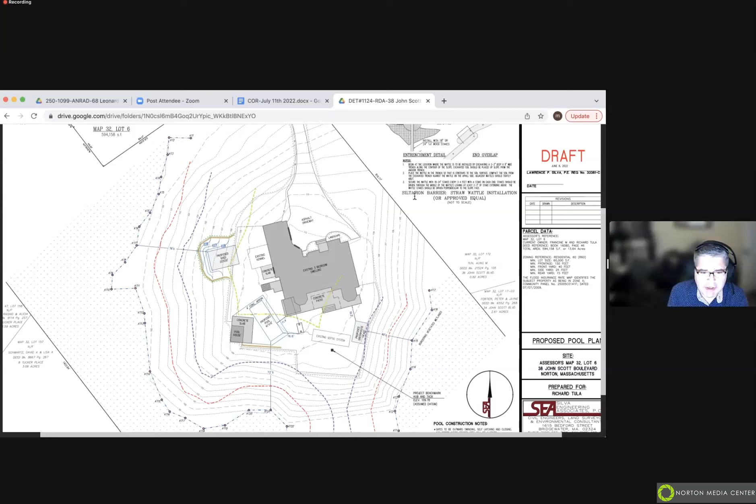Yes, and for some reason I'm having a hard time finding my plan, I have so many different drawings and so many different plans. But let me see if I could. It's just something to consider to cut down on the grading back there. Sure. Okay. So if you just rotate it, you don't have that grading. Oh, I see. Oh, you have it up. Okay, great.

Okay, so rotate it so the long side is perpendicular to the house. Yes, the front and the back running parallel with the contours. It will just cut down on your grading. Yeah, that's not a problem. I can do that. That's easy to do. I mean, if your footprint's going to be the same, you might as well. Yeah, the only thing I was trying to do is sneak it in between 2 trees, just go straight back between 2 trees.

What I can do is put it more towards the house and avoid that one tree that's probably about a 20 inch diameter tree that I was trying to avoid taking down. Okay. But I can rotate it. That's not a problem. I can do that. Okay. I mean, whatever works best for you. Either way, it's in the outer buffer zone.

Just a word of caution. If it's that tight between 2 20-inch trees, it may be prudent to take one of them down, because as the shed sits there, both trees will grow and potentially get very uncomfortably close to your shed, in any kind of weather. You'll have to decide. You may need a little bit of a clearing to make that shed functional without a lot of unwanted maintenance.

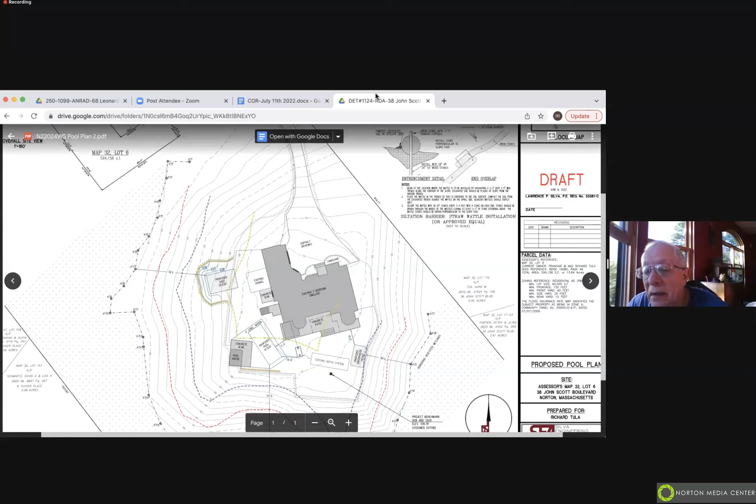So if there are no further questions, we can consider a motion to close the request for determination, 1124. Say again, was that a question? If there are no comments from the audience or questions, I'll make a motion to issue a negative 3 for DET file number 1124, 38 John Scott Boulevard. Well, actually, what we need to do is wrap closure of the hearing into that motion, and we may need to close it and then repeat the motion. Yeah, right.

I'll make a motion to close the public hearing for file number DET 1124. Second. Motion made by Lisa and seconded by Dan. Again, roll call vote, starting with Mark and Dan. Aye. Aye. And Carrie and Lisa. Aye. And Tama and Ron. Aye. Aye. And I'll throw in an aye. So the motion carries. We're now back in a regular meeting. We can consider a quick motion on a negative determination for file number 1124.

I just had one question. What does a negative determination mean? Yeah, it means that your project will be approved as submitted, and the negative part means you do not need to file a notice of intent, because the title of this process is a request for determination of applicability, which means you can either have the project approved as it's submitted, or you need to go through the more extensive notice of intent process. Okay. But because this is somewhat of a limited project, it's perfectly acceptable to be decided as a determination, and a negative determination means you're all set, and it just has to do with the paperwork on the form. Understood. And it's so-called negative 3.

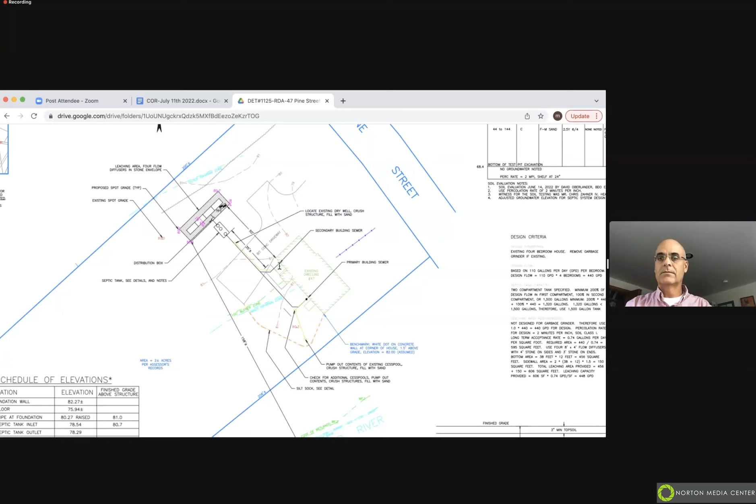Yeah, so other than that, it's pretty straightforward. The elevation up from the river is, I forget exactly, but I want to say we're like over 12 feet higher than the river. So, any questions? Yeah, I just want to add some details.

So this is on Pine Street where I believe the Rumford River crosses under Pine Street, just before Plain Street takes off. So it's got that complication. You can just see the Rumford River there at the bottom of the plan. And the first 100 feet is illustrated there as the inner riparian zone with the solid blue line with the dots. And I'm not sure the outer riparian zone is visible on the plan. It's actually just north. But that's the only complication.

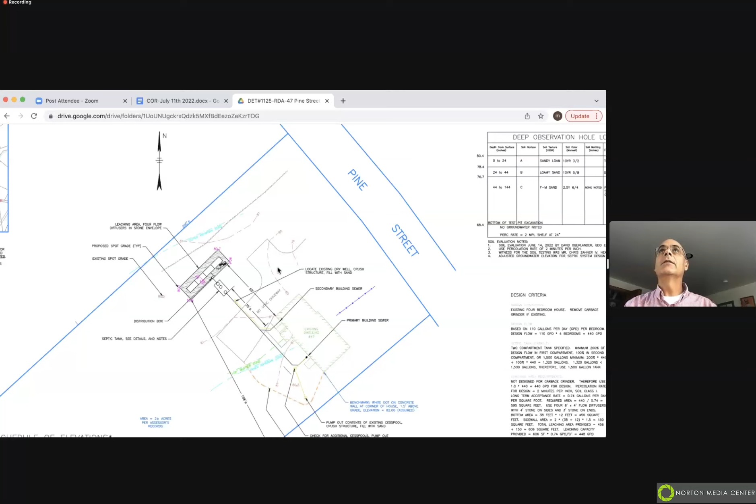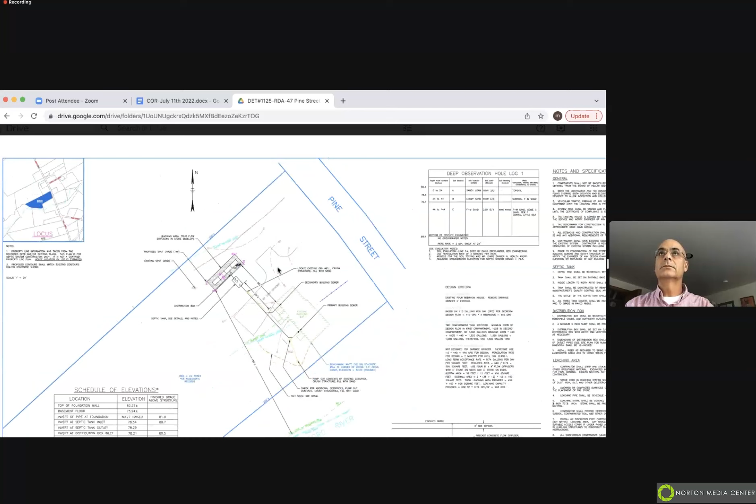But as you said, this is a very standard repair. The only issue is, let's see if you have illustrated sedimentation control. Yeah, I do. There's a detail on the plan, and then we're showing the silt sock from the left rear corner of the building foundation up to the high point at the driveway. Yeah, actually, I mentioned the wrong thing, I mentioned the water line, but on the plan, it's visible as the long blue dotted lines. Do any commission members have questions about this?

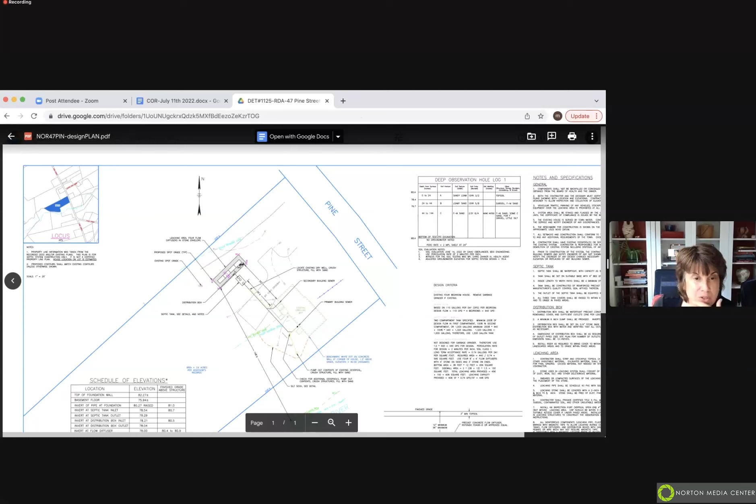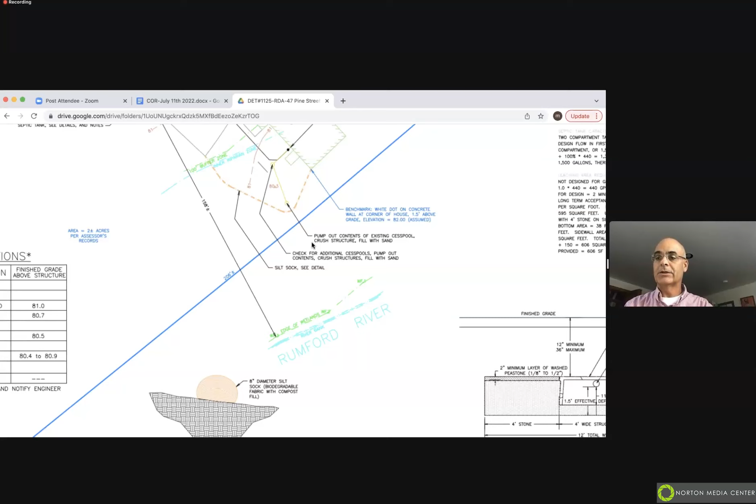And Dave, did John Thomas review the flags associated with riverfront out there? I just see EDW limit. Megan, can you zoom in on the river, please? I assume John Thomas went and looked at those flags. Yeah, I'm sorry, you kind of came over garbled a little bit, Lisa. Could you repeat that? Who did the flagging, and did John review it? I did the flagging, and I believe John reviewed it. Yes, because he reviewed the plan initially, and I got back some comments a couple of weeks back. Okay. Well, as long as he reviewed it.

And then, for some reason, my copy of this RDA is unsigned by the applicant. Megan, is there another one on file with the applicant's signature? Typically, I'd sign them as a representative, and I've checked with DEP before, and actually, I went through this with Jennifer, and I'd say the last 20 or so I've done, it's either the rep or the owner. Yeah, when I stop sharing the map, I can double check. Okay. Those are the only comments I had. Thank you.

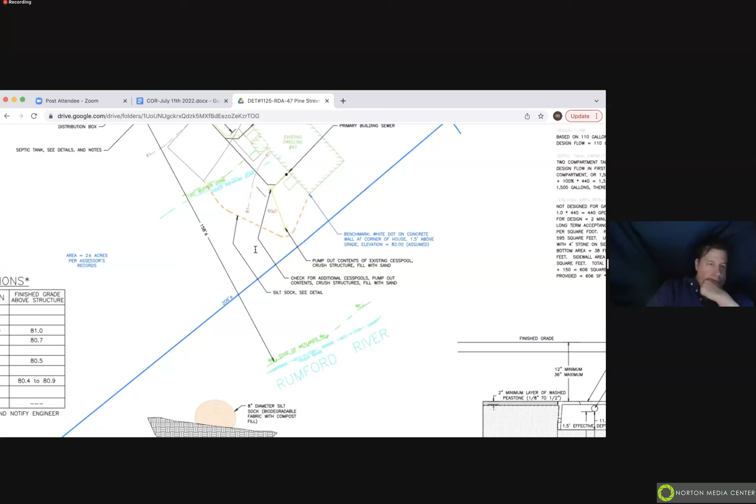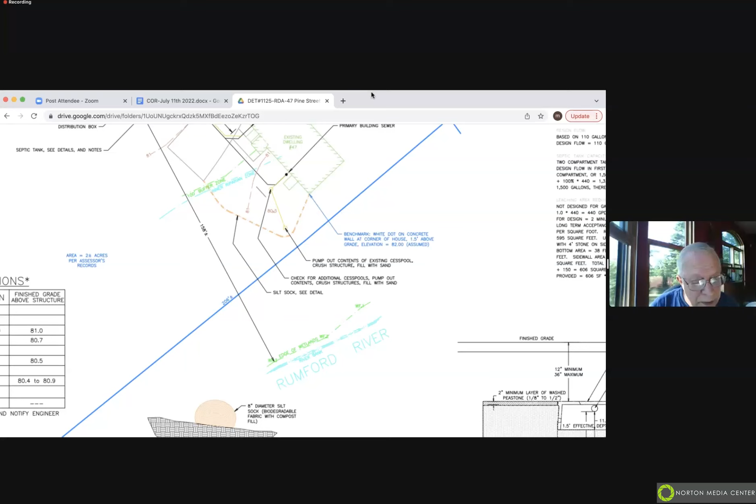John did leave a note on June 28th, 2022. He inspected the site and validated the resource areas per the submitted plan. He also had no concerns and recommended a potential negative determination after deliberation. Any further questions from members of the commission? And I think we can open it up to any audience members if they have any questions or comments. You can take your mic off mute and ask them. Otherwise, this is a straightforward project, and we can consider a motion to close. This is a request for determination of applicability.

I'll make a motion to close the public hearing for file DET 1125 for 47 Pine Street. Second. We have a motion made by Lisa, seconded by Ron. Again, we will do a roll call vote. So starting with Tama and Mark. Aye. Aye. And Carrie and Lisa. Aye. Aye. And Dan and Ron. Aye. It looks like, Dan, you have a check mark up there, so I'll throw in an aye. So the motion carries. We can consider a negative determination if somebody wants to make that motion.

I'll make a motion to issue a negative determination for request for determination for DET file 1125. Lisa makes a motion for negative determination. Do I have a second? Second. I think Tama got the second. So again, roll call vote starting with Tama. Mark? Aye. Dan? Aye. Carrie? Aye. Lisa? Aye. Ron? Aye. And I'll throw in an aye.

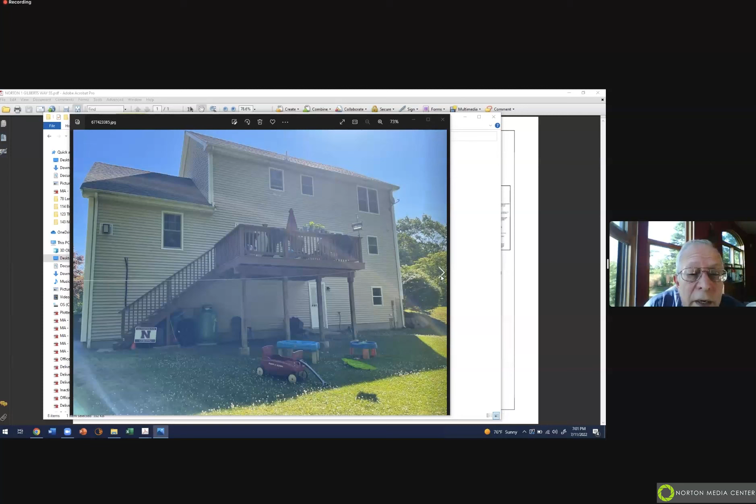So basically, you have a structure with a stair going up to the deck that is elevated on what looks like 4x4s, although they may be larger. And you're saying all of that would be removed, and the all-season room would be on the first floor, extending to the second floor, or? It would just be the first floor. You see the red umbrella there on the deck. There's a slider here, and the all-season room would basically just be same floor level. Same dimensions of this deck, so we're going to keep that same space.

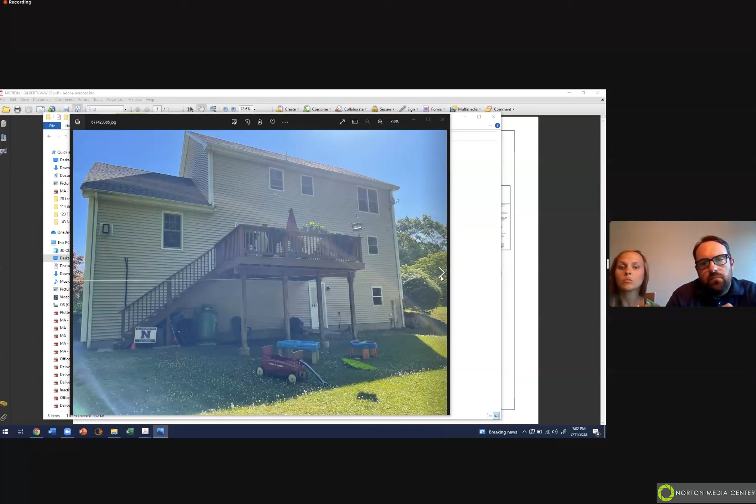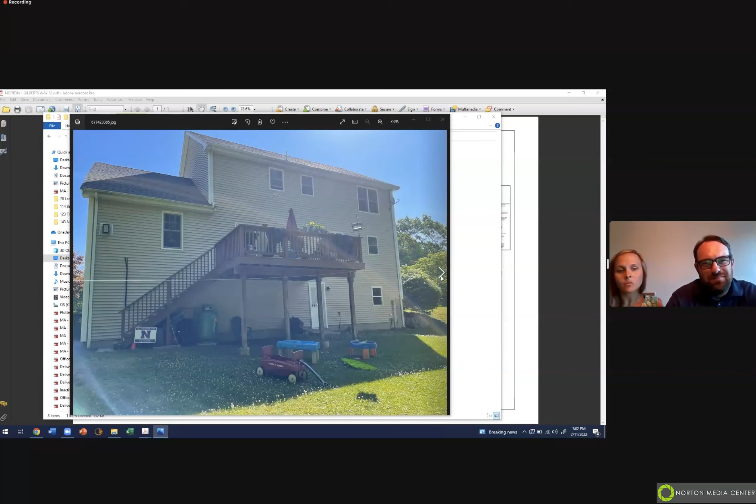And then going towards the back right of the house, that's where we'd have the new deck, for outdoor space. And then you would have your set of stairs coming back down towards the driveway. Right now, the way it sits, it doesn't actually impact where the pool is. There's actually a few feet from what we measured, but it does come close. We just don't want to take a chance. Great. So the all-season room is going to be on the first floor or the second? It will be on the first floor. Here, I'll show you. Okay. All right.

So this is the first floor plan here. It kind of shows the new covered front porch that we have here, some new stairway walking into the entryway. So existing first floor plan, it would be an open floor plan. It actually just walks in the same elevation as our existing floors, and it just copies the layout of the existing deck. A new slider will be installed here, so they walk out to the new deck space here, and then the steps going down.

All right. So these are actually issues that are not directly under conservation, but one of the comments that our conservation director made is that you really need to have the building inspector involved with regard to the additional footings, because this is not just a simple deck. This is kind of a structural portion of your house. So I assume you've involved the building department.

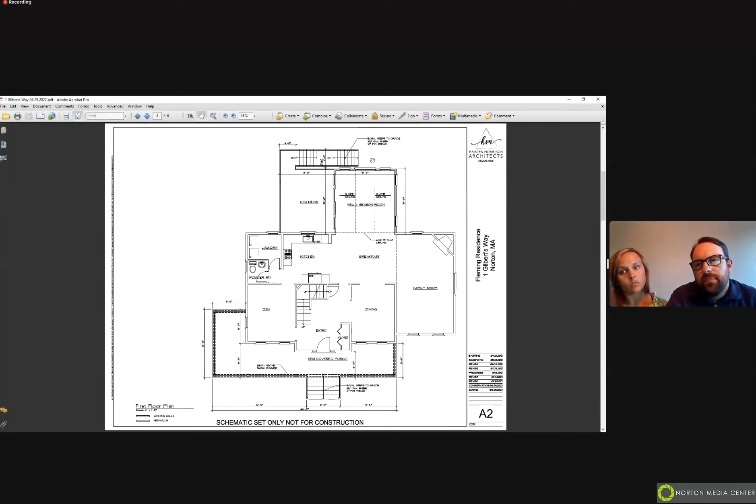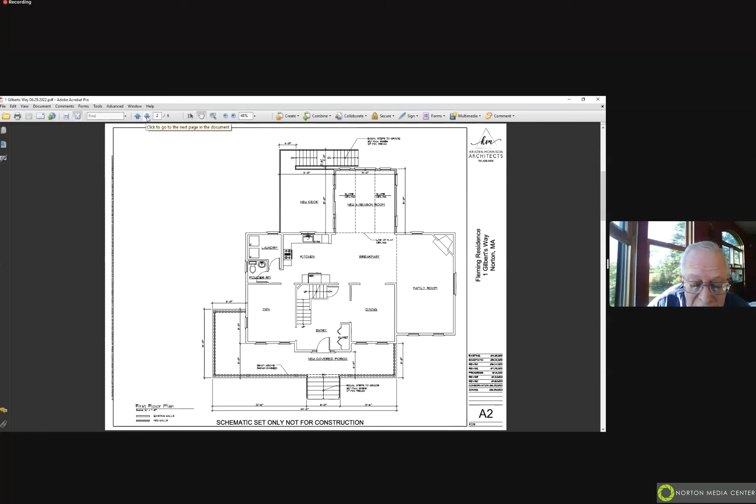So we actually have existing drainage on the house, and we found a way to just tie them into our existing drainage system. So basically, there just won't be any runoff right off the roof. Everything will be gutters. Okay. All right. Any other questions from members of the commission?

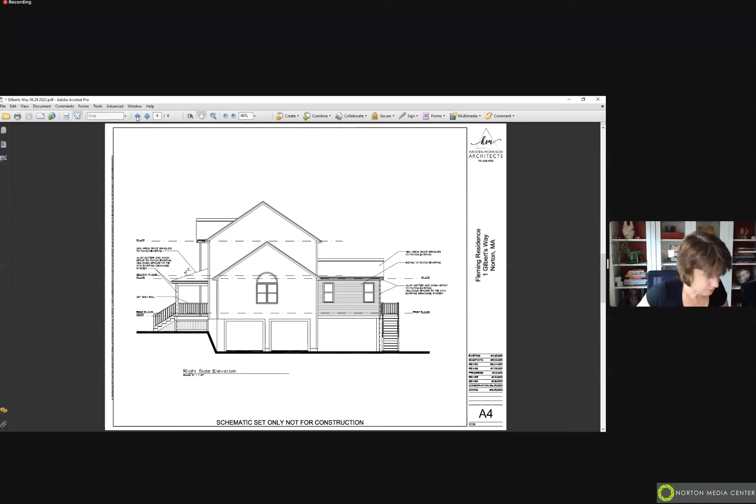Yeah, I just have a few. If we go back to the plan view, your engineer showed a limit of sediment control or silt sock control, but it's not labeled. So I'm going to ask that you label that. And then, is there any reason it extends so far into the backyard? If you're only going to do work around the pool, you don't need that area to stage or stockpile material. You want to move that sediment control closer to the limit of work where the pool is.

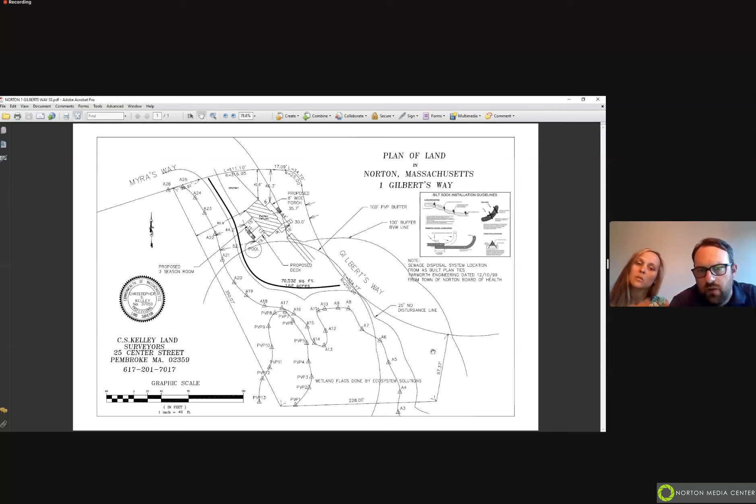Okay. I'm not sure why he made it so big. I know we talked about making sure we were covered due to the work on the front porch, and I told him I didn't have any issues putting up more. But if you think we should do less, we can definitely install less. We can talk to him and have him provide. Yeah, it should be less, and you can wrap it around the pool on the south side of the house. And he wants to put a label on it. It's unlabeled right now. Okay.

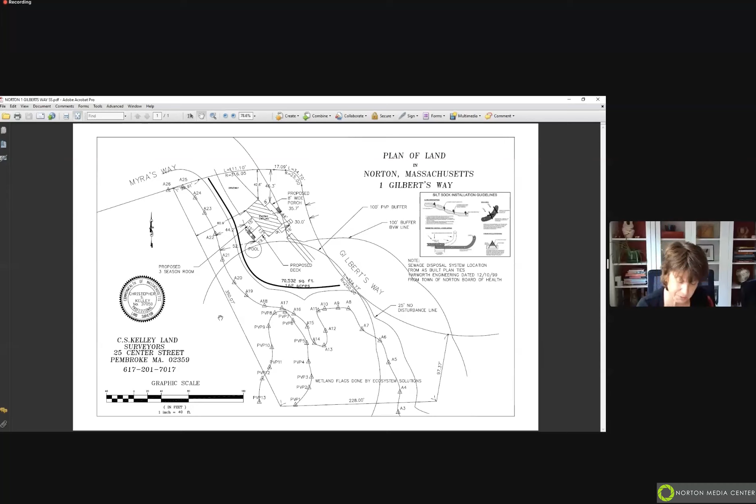That's fine. I think we're still waiting for a file number anyway, so you can just get us that plan for the record. We do have a file number. We did get it. Just letting you know. I have a question. Am I coming through? Yes. You're breaking up a little bit, but try your question. Okay, my question is, the words proposed deck, right above those, there is something slanting down to the right, down southeast, I guess. What is that? Oh, that's septic? Okay. Yeah, septic. Oh, so Megan, what's the file number? 1106. Okay, thank you.

Yeah, I think so. The request from John was to continue it. So all of this seems very consistent with whatever limitations there are with regard to wetlands protection. So I don't anticipate that that's going to stand in the way of your project. It obviously will be conditioned. But what we would like to do is continue the hearing till our next meeting.

And let's see, our next meeting is the 25th. And it's up in the air as to whether it will be Zoom or in person at the library. And assuming there are no problems that require additional data, we can close at that time and issue an order of conditions. So is that something that would be acceptable?

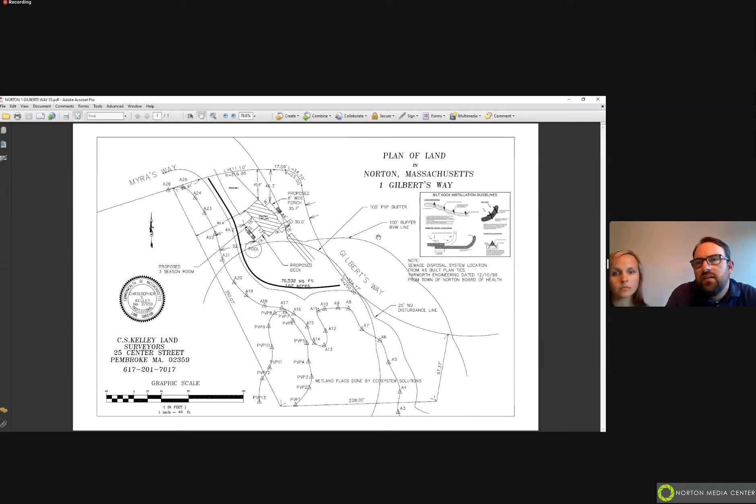We'd be good with it, yes. Okay, Mr. Chairman. So unless there, yeah, go ahead, Dan. Well, I was just going to make a motion, but I guess maybe you were going to open it to the audience or something. Well, I think we already opened it to the audience, and I didn't hear anybody pipe up. Let's see, I don't see any hands up. Here we go, participants list. So there are no hands up. So I think we can consider.

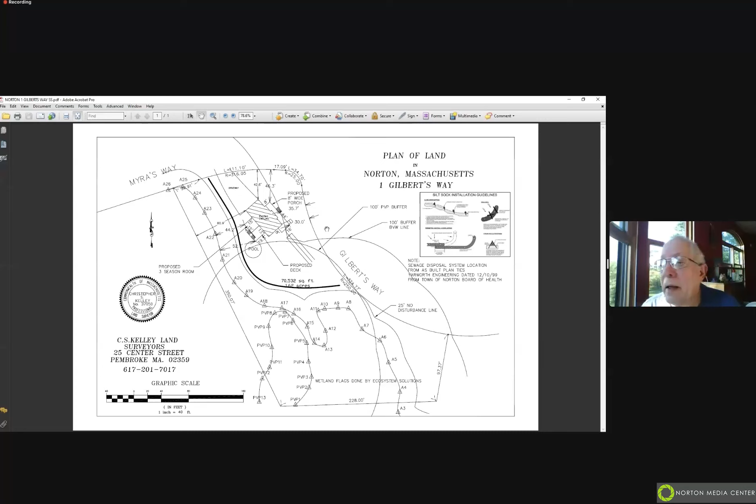So moved to continue file number 25-X to July. I'm sorry? There's a file number. You meant 1106. Oh, 1106, I'm sorry. Yes. Okay, same meeting. We're just going to continue this hearing to the 25th of July. All right. Second.

Dan made a motion for continuation of this hearing till July 25th, seconded by Lisa, and again, roll call vote, starting with Tama and Mark. Aye. And Dan and Carrie. Aye. Aye. And Lisa and Ron. Aye. And I'll throw in an aye.

So I think likely the Conservation Office will be in touch with you regarding whether you need to be present for that or whether we'll just close and issue an order of conditions. All right, thank you. And we may see you next time, but we may not. All right, thank you.

All right, our next item. I can find my agenda. Is an abbreviated notice of resource area delineation for 0 Pine Street with regard to, I believe, Kirk Pickell as either the owner or the representative. Do we have a representative for this project? Yes, Claire Hogebone with LEC Environmental Consultants representing the applicant. All right, if you could go ahead. I'm sorry? You're co-host, so you can share your screen if you need. Oh, great, thank you. I will share my screen.

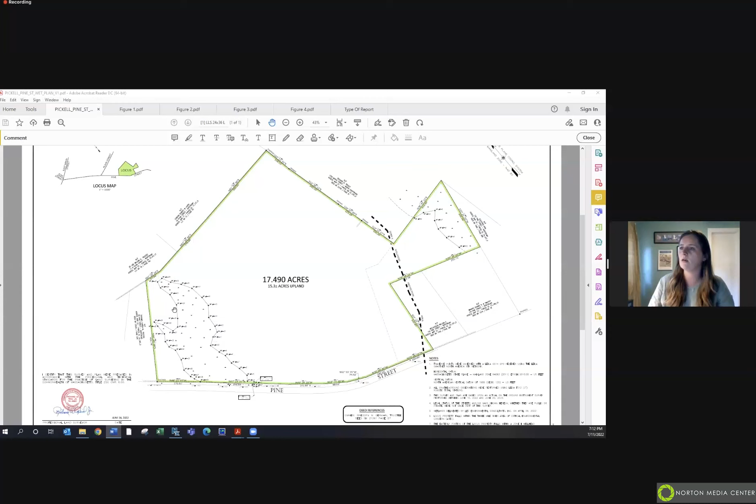I'm going to share the plans that were submitted along with the application. Can everybody see the plan set? Yes. Great, thank you. So again, Claire Hogebone with LEC representing the applicant, which is Brownstone Investment LLC, for the ANRAD application to confirm the boundaries of bordering vegetated wetlands on two parcels, both identified as 0 Pine Street. The wetland resource areas identified include bordering vegetated wetlands. We have one in the northern portion of the site. You can see the north arrow directing in this direction.

So the northwestern portion of the site contains a bordering vegetated wetland associated with an intermittent stream that forms closer to Pine Street and flows through a culvert beneath Pine Street and continues to the south. We have a second bordering vegetated wetland in the eastern portion of the site, and that too is associated with an intermittent stream that's located off-site, again flowing south through a culvert beneath Pine Street.

So we delineated the wetland resource areas in, I believe, late April of 2022. And when we filed, John Thomas took a look at the wetland resource area boundaries on June 30th, and through email correspondence he confirmed that he agreed with the wetland delineation. So no field changes were made. So the plans you see before you were the plans we submitted initially and what we're requesting approval of at this moment.

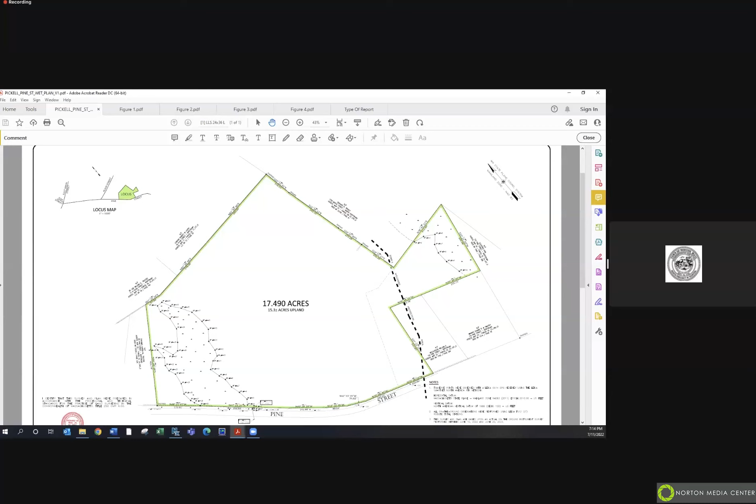I think additional points to make is the site is mapped within an ACEC. We have the Zone 2 wellhead protection area noted, which contains the eastern segment of the site. And I believe that's it. So if you have any questions, I'm happy to answer them. I have no questions, but a question for Megan. Did a file number come through on this project? No, nothing's come through yet. DEP is really backed up right now, so we're waiting for a couple file numbers.

All right. So any questions from commission members? So yeah, I have a few, Julian. Go ahead. So Claire, the first thing I'm going to ask is that whoever prepared the plan label the respective lots. I noticed there's a dashed line separating those lots. It's just not clear which one. This dashed line here? Yes. So that dashed line separates the two lots. As I noted, there's two lots. They're both identified as 0 Pine Street, which is a little confusing, but this gray dashed line is what defines the two separate lots. Right, but I would just take it a step further and identify those by map and parcel. They have separate maps and parcels, right? I see, yes.

You are correct, and I believe that is noted somewhere on the plans. Right, but not on the lots themselves. On the lots themselves, that's a good comment, thank you. So, unless it's in the narrative somewhere on the plan, is there a lot size on the other lot? I see 17.490 acres on the larger lot. Is there a lot size on the other one?

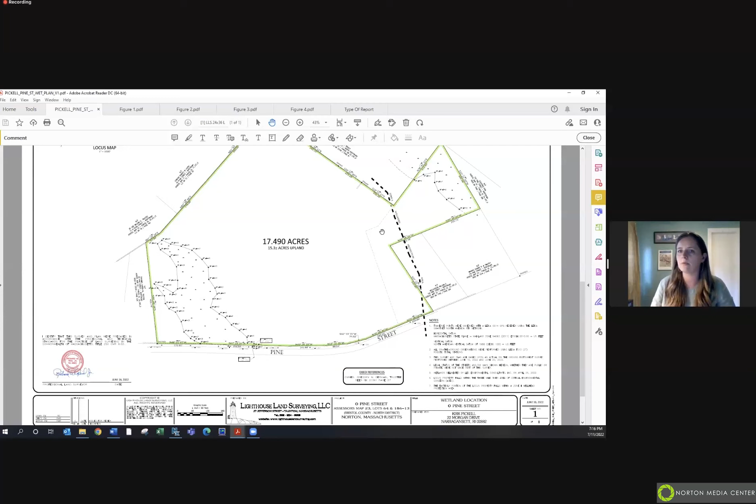No, so since it was combined into one site for the application, I believe the surveyor just combined the acreage into one number. But legally they're two lots, right? I believe so at this point, correct. So we'll want those labeled separately, map and parcel, lot acreage as two separate lots.

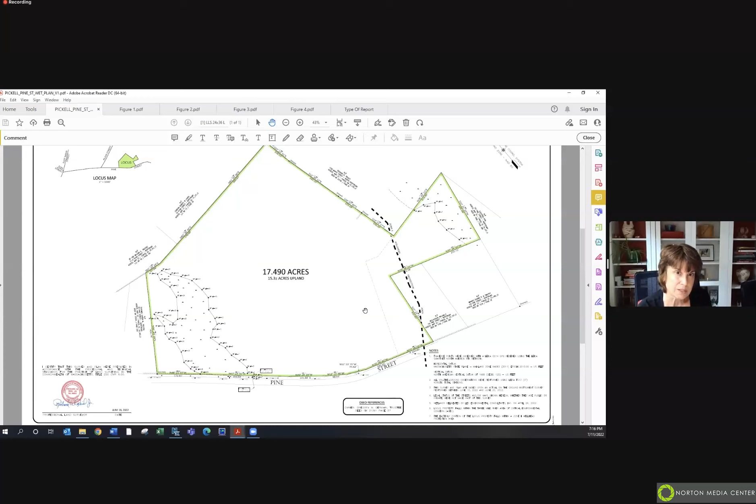Okay. So the other question I had is the intermittent stream on the wetland to the west. This one here? Yes. So did you flag that as it enters that culvert as it crosses under Pine Street? I did not delineate the boundary of the intermittent stream within the wetland itself, but the culvert is identified right here. Oh, but the thread of the stream going into the culvert on the site, that wasn't flagged. It was not flagged, no. It is entirely contained within the wetland itself.

Okay. The last comment I had looking through your narrative was that you mentioned there's a potential vernal pool around flags A18 and A23, but you were not tasked with going out there. It was outside of the season. So I believe the jury's still out as to whether that qualifies as a vernal pool. Correct. So I don't know how we want to handle that. I'm going to defer to John Thomas, that we put that it's a PVP, or do we put in the findings that that may contain a vernal pool, and that we would ask them to confirm it next season.

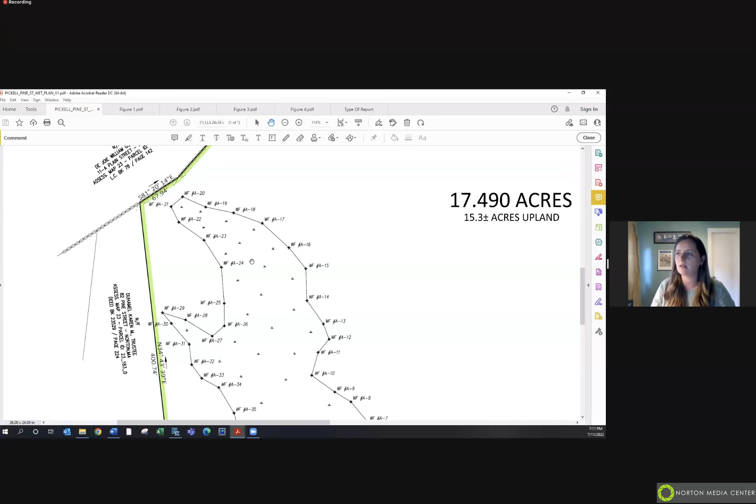We have to continue this either way. So I'd just like John to come up with some creative way of addressing that, so we don't lose track of it. Yeah, I think that's fair to request, and it could be noted in the ORAD. I think you make a good suggestion that John Thomas could have something written up in the ORAD to note that there is an observed depression within the wetland, that if we come forward with a notice of intent and it's at the right time of the season, we could share results of a survey at that point.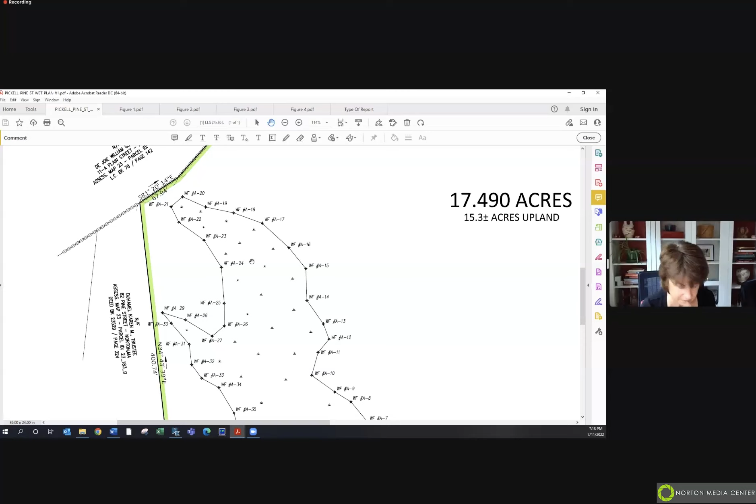Okay. So just mark it on your calendar for next spring, right? Yeah, right. Okay. So if you could, Megan, pass that info along to John Thomas about the PDP there. Okay. That'd be great.

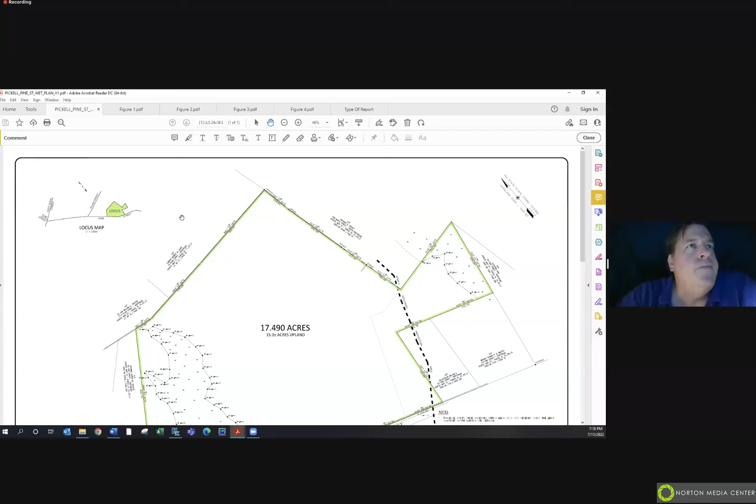All right. Go ahead, Dan. So I was just going to say, on this plan, we just see the upper left-hand corner again with the locus. I think it's the same point, the same page. Yes, there. Okay, yeah. Thank you. Of course.

Any further questions from commission members? And if not, any questions from members of the audience? You got some hands up there, Julian. Oh, we do. Okay, I guess we'll go to somebody called Bob. Go ahead and ask your question.

Hi, yes, this is Bob Butler, I live on Pine Street. I was just curious if we could discuss, if we know what's proposed for this land. I know we have two other very large areas of land by the same landowner up for development. I noticed that the applicant is actually different for this parcel or two parcels, but it's the same landowner, and LEC is involved in this as well.

Yeah, I don't think the commission has any information on that. I don't know if the representative, Claire, you want to make any comment about that? I don't know if I would like to make a comment at this point, since this is an ANRAD application and it's not for a proposed project. I would note that it is a different landowner from the other properties. I know the similar landowner had the properties beforehand, but the current landowner is not the same.

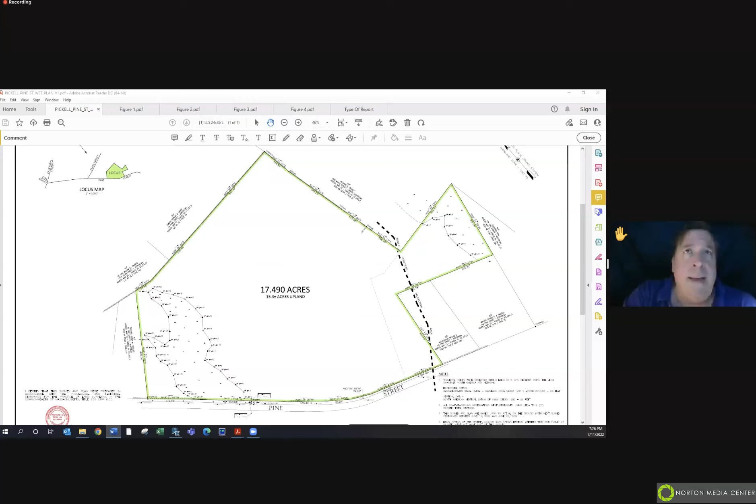Okay. But is there a particular study, or if I was curious to know more about that, how would I? Is that something the Conservation Commission would take into consideration? I can start to answer that question. Go to mass.gov, ACEC program overview, or mass.gov generally, and type in ACEC. Okay. There are various ACECs around the Commonwealth, not just this one. Yep. That is a place that you might consider starting. Okay. And I have a similar question: you mentioned wellhead protection area. Are there also additional protections or requirements based on that in this parcel?

I think it was mentioned earlier in the conversation. Is that a zone 2, Claire? It is a zone 2. Yeah, that will most likely play out in the planning board or zoning board regulations for potential uses that may be restricted in that zone. Okay, so it sort of more defines what can be done and what uses for that zone. Okay. Yes.

Actually, one last one. There's been some discussion of a potential Army Corps of Engineers study, and I think one of the concerns there is that, I'm not that familiar with this, I'm sure the rest of you are a lot more than I am, but it sounds like there are certain minimums, I don't know if it's property sizes or conservation or wetland sizes, that would trigger a study. And this property was originally planned to be sold together. It's now being in different parcels, but the concern is that for that reason, a study may inadvertently be missed.

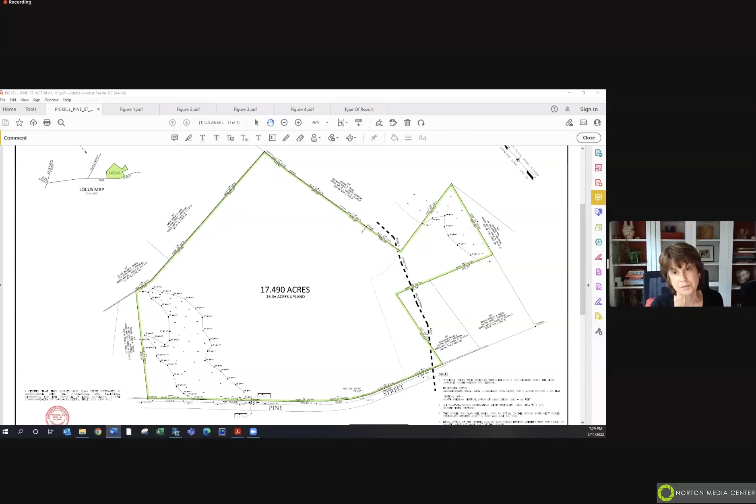Yeah, let me just say that the only time that the U.S. Army Corps of Engineers would get involved in a project is if you were physically altering or filling the wetland. And then again, it's over a certain threshold for fill. There's no study per se, but the applicant would have to apply to the Army Corps for a permit if they were altering the wetlands directly.

Okay. The reason I ask is I think at one of the last planning board meetings, there was a discussion of that due to some percentage of wetlands that was intended to be filled or discussed to be filled. But it was not on Zero Pine. And so just curious if that is part of the purview of the Conservation Commission, and if that would be something that would be looked at with several of these properties together. Yeah, but we can't assess that until there's an actual project presented. Okay, that sounds good. So maybe we can move on to some of the others.

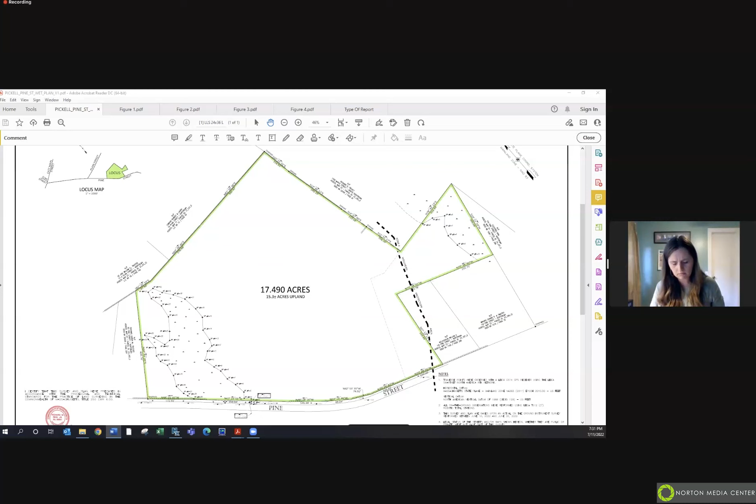Again, the person on the computer named Patty, you can go ahead and ask your question. Yes, hi, this is Paul Benninger at 148 Pine Street. Just building on the last question, there was a letter from LEC dated June 30th referencing Zero Pine Street. And there's a quote in the letter that says the proposed project will result in temporary and/or permanent disturbances to the bordering vegetated wetlands and in the associated 100-foot buffer zone, areas protected under the Massachusetts Wetlands Protection Act and implementing regulations. So, and there's... That's the next filing. That's not associated with this filing, is it?

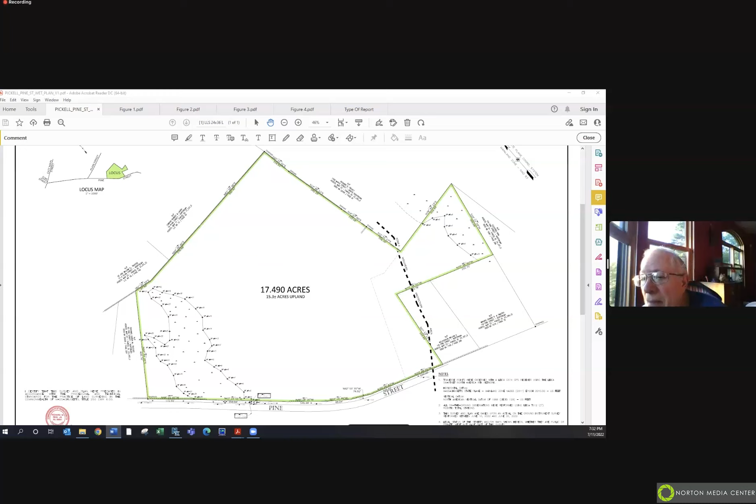No. I think you may be referring to what's labeled on ours as Balfour Farms Cluster Project, but there's no work proposed on this parcel, so I don't think there's any letter referring to this. But we will be moving on to that project soon, so maybe you can revisit that then. And is that this call or in a future meeting? It's our next item on the agenda. Thank you. I think you answered my question. And we had another hand up, but I guess they may be moving on to the next hearing. Okay, sounds good.

And now, any other questions? If not, I think certainly from the information that our conservation director submitted, he did not have any further questions, and he's recommending that we close the public hearing. So I think we can. We can't close because we don't have a file number. Oh, okay. Yes, that was option B. Yeah. That was if there was a number available, and there isn't a number. So we need to continue until

the 25th. So I'll make a motion to continue the public hearing for 0 Pine Street, map 23, parcels 64 and 186 to the July 25th, 2022 meeting. Second. We have a motion made by Lisa, seconded by Dan, for continuation of this hearing until July 25th. So we'll begin with a roll call vote. Carrie and Lisa. Aye. Tama and Dan. Aye. And Mark and Ron. Aye. And I'll throw in an aye, so we'll see you guys next time. Thank you.

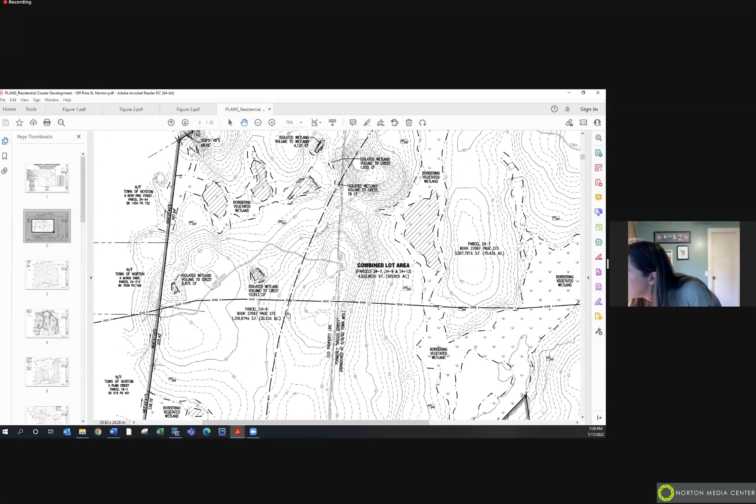I think it's labeled as, I think it has to do with the well. We have the zone 2 going across here, and I see an IWPA, perhaps? Yes, and that I wasn't sure what it meant, and I was wondering if you were aware, and if not, maybe we can have that brought before us to define in a future hearing.

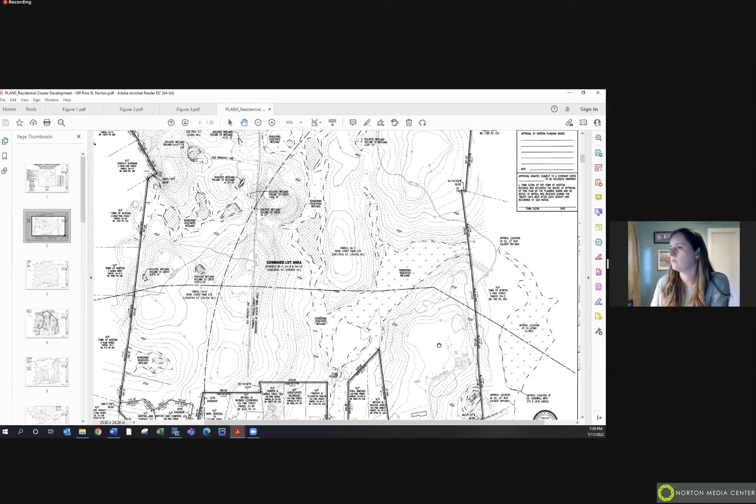I appreciate that question, because I am also curious what the IWPA is standing for. I'm sure it's an acronym I've seen before, but I appreciate wanting to clarify that. And we do have the zone 2 wellhead protection area going across the site. Okay. So the IWPA is, I believe, interim wellhead protection area, so one's groundwater driven and one's surface water driven usually.

So again, I think that's gonna come into zoning and uses allowed within those drinking water, the radiuses that are measured off of drinking water supplies. Right. And thank you for pointing that out. I think ultimately still what I'll ask the engineer to do is to include in the side notes here a note to spell out those abbreviations so it's clear. Because I'm assuming that those designations can possibly affect some activities of development within that site. That's why I think we need to have it clarified right up front.

But if you don't have the details now, that's fine, but we can just make a note that we need to bring it out in the discussion in the future. So why don't you move on. Sure. So just to jump down to our general lot layout, we have two residential subdivision roadways. We have Germain Way here, a looped road, and we have Lloyd Circle, a longer road with a cul-de-sac.

Ultimately, last fall, after we had the wetland boundaries approved, we met with Jennifer Carlino, the agent at the time, and shared a plan with her that was not this conceptual plan. It actually did not have a wetland crossing, and it had some more development located up here in upland areas. And when she first saw that, she noted how we have a lot of vernal pools here and a lot of surrounding terrestrial upland habitat, which is really important to the migration of those vernal pool species.

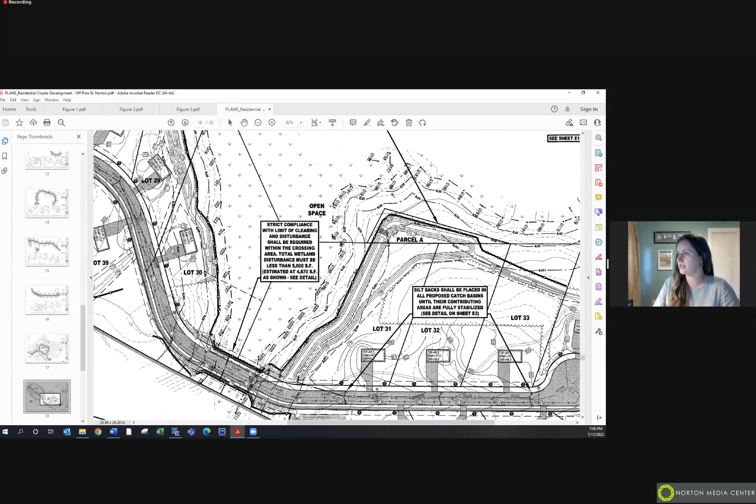We have 5 stormwater basins also along the development here. Again, similar to the other side, the stormwater basins and associated grading are no closer than 50 feet to the wetlands. And we have erosion controls proposed along all of that work as well to protect the wetlands from any erosion or sedimentation that could occur. The crossing is going to provide access to 8 lots here. And in an effort to mitigate for the permanent alterations to the wetland for the wetland crossing here, we have proposed wetland replication occurring over here along the G series wetland.

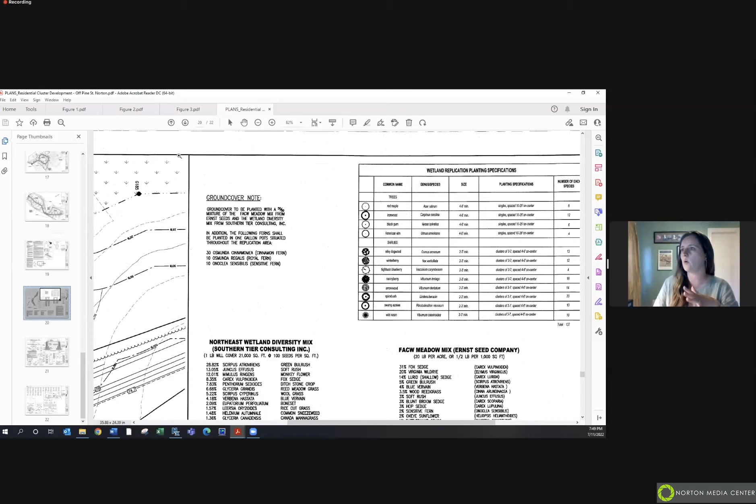So what I'm going to do is just jump to sheet 21, or yes, sheet 20, very briefly to go over the wetland replication. And so as you can see, we're sort of in that corner where we have the proposed stormwater basin, and we have a long stretch of wetland replication proposed. The replication area is a little over 6,000 square feet. So all in all, it's about a 1.45 ratio of the proposed replication to the permanent alteration. So that essentially will mitigate for our permanent alterations for the crossing. Any temporary alterations associated with the construction will be restored in place.

We are proposing LEC to be on site for any of the activities that are occurring at the wetland crossing to ensure the protection of resource areas there. And we will continue monitoring not only the wetland replication area after the construction of it, which we would oversee as well. We will monitor the buffer zone plantings that are restoring any buffer zones. We'll monitor the restored portions of the wetland from the crossing as well. I hear a question maybe coming in.

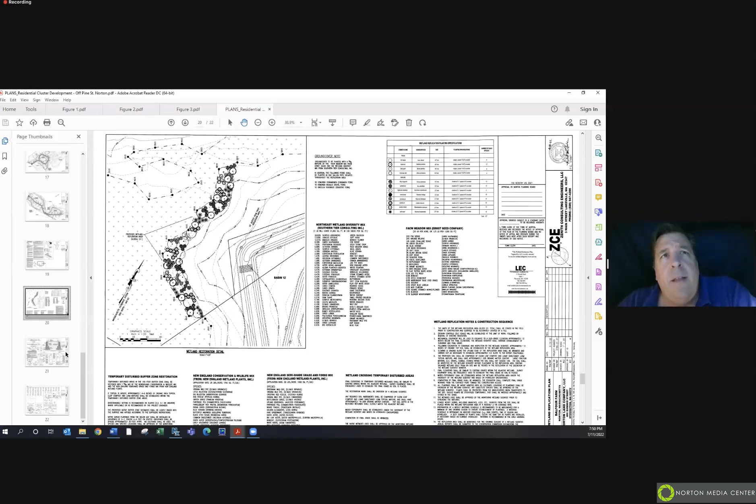Dan? Yes, I'm having a little trouble hearing, but do I understand correctly that there will be a 40% increase in wetland when this project is done? I think that sounds correct. That's ultimately the ratio that we're going with. We are impacting permanently 4,146 square feet of wetland, and we are creating 6,020 square feet. So yes, a 45% increase of wetland sounds like a correct

assessment. Just a note that you may want to take into consideration is we have had discussions in the past about the true effectiveness of a replicated wetland. In other words, they don't necessarily always function identically. So I personally, and I think other commission members will potentially agree, am not necessarily in favor of installing a larger percentage because it's never really clear that it's going to be a permanent wetland area, particularly if you're disrupting potential old growth upland trees and so on.

So you may want to look at the site. Other commission members can weigh in, but there's not necessarily an advantage to disrupting more upland to create what you're going to call a wetland that may not actually truly function as a wetland in the long term. So just a point of consideration.

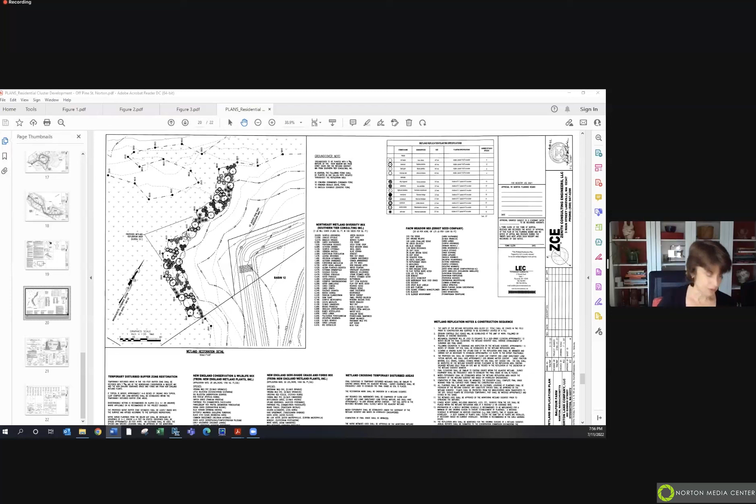So will the open space be open to the public or just the residents of this community? That is a good question, and that's been coming up in our planning board reviews too. So it's ultimately up to the town if they want to take that open space or not. And if they don't, it would end up in the ownership of the HOA of the development.

Okay. So that said, if we could go back to the layout plan. Sure. We did not do, as a commission, a great job with Arrowhead, which is notifying the public of how to access, where to access, and where to park, if it is indeed going to be open to the public, because people have now started to infringe upon the easements that allow you to access the Canoe River, for instance. It looks like somebody's side yard, so you're trespassing. It's not a comfortable thing.

So I would ask that signage be put up, split rail fencing, you name it, to direct the public to the fact that they have rights to traverse in between those houses at some point. I think that's that space. Yeah, I think that's a good suggestion. I think the project team is just waiting on the town's decision for that in case the town had input on how they want to handle that.

Okay. So the next thing is the engineer that did these plans has either got to hire a CPESC, because everything they wrote is obsolete, and we're talking 20 years ago, 30-day time frames for inspection. So that entire series of notes and details has to be bombed out to meet the 2022 CGP. It's just obsolete. Can you point out what page is that on? It's any note that has to do with erosion prevention and sediment control.

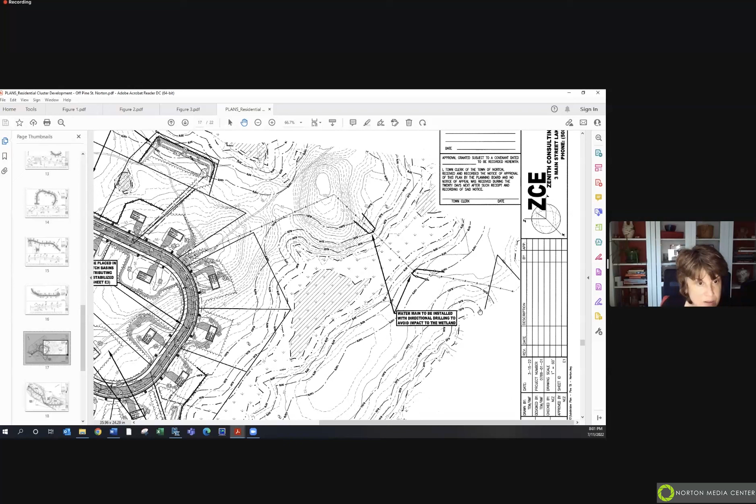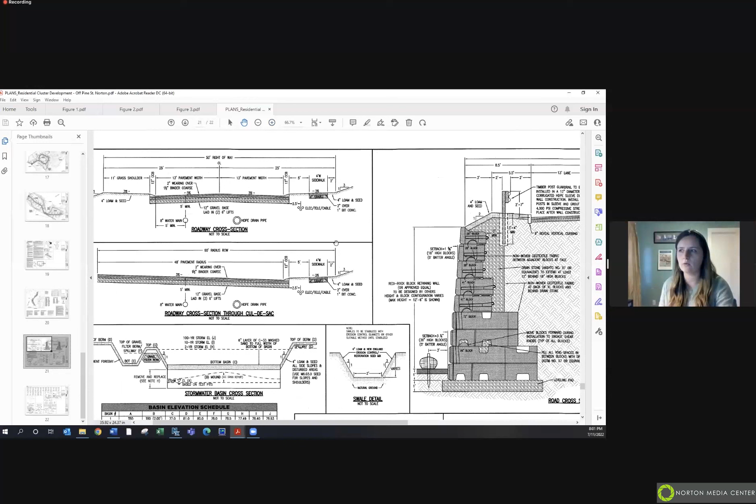Horsley Witten had the same question I did about the 24-inch. Now we're going to go to the culvert, the crossing. How that 24-inch is sized, because I've seen many of these in my day where the water is just not conveyed with a simple pipe under a wetland. It's not dispersed through the wetland. It should be open. That's my first comment. Second, okay, so you just want to see sort of like the work behind why 24 inches was determined.

Okay. The next thing is, let's go to the 4,600 and something square feet. Sounds like that was based on a temporary impact of 3 feet, which I think is extremely impractical to build a wall. So if you're going to get equipment back there, it's probably at least 6 to 8 feet. So I think you're going to have to revisit your temporary impact numbers to represent a realistic workspace, if indeed that's what it was based on. And I think you're going to go over 5,000.

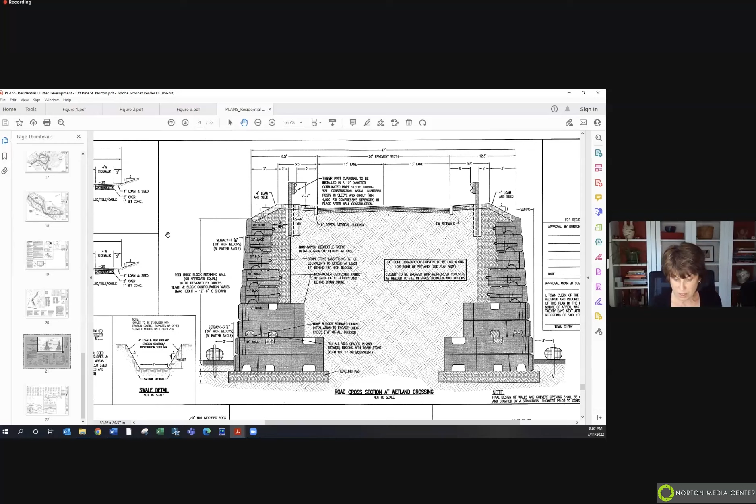That said, I'm just curious as to why you invoked limited project status for several reasons. One is you typically only invoke it if you're going over 5,000 and you don't meet performance standards for the crossing. Two is, if we can go back to the layout plan, you mentioned in your narrative many times that there's no other access. So, you invoke limited project status when there's no other way to reach the upland. I'm seeing a clear path from Briggs to avoid that wetland crossing. So I know you got into the hows and the whys, but that's why I'm not really seeing this limited project approval, because there is definitely another way to accommodate that access without crossing the wetland.

Well, so we mentioned the Briggs Street option when we discuss the limited project provisions at the end of our report, and that is where an entry from Briggs Street, potentially going in this direction, essentially cuts this certified vernal pool out from any migratory paths. So a Briggs Street entrance would still fragment some of these vernal pools.

We're mixing parts of the regulations now, because it should be that you have no other access except through the wetland, and I'm not seeing it. So it exists, right? So I just think you better look at the definition of that limited project and how it applies. Okay. Because if another access exists, you cannot claim limited project status. Okay. What else? All right, we talked about the wall. Okay, I think I'm done for tonight.

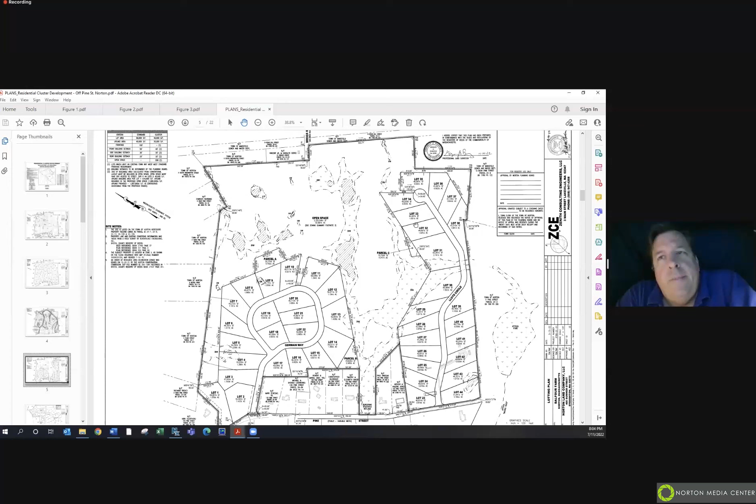I think you might have misspelled forest on this page. A little farther down. Has the mixes of the grasses and forest mix or something like that. Anyway, just thought I'd point that out.

I think I have one other comment for you about the potential wildlife habitat assessment. So if we are going to look at possibly not fragmenting versus crossing, you need to give us a better alternatives analysis, and weigh that against the functions and values of that wildlife habitat in that area. So I will ask you for that. Because now you're starting to weigh the pros and the cons of the alternate access. Sorry, now I'm done.

All right, other commission members have questions? If not, we can move on to the people that have their hands up. And I think from the computer named Bob, if you want to take your phone off mute and ask your question, identify yourself, please. Sure. This is Bob Butler, 133 Pine Street. I see that the peer reviewer would like to speak, so if she'd like to go first, I'm fine with that. Is that Janet Bernardo? Yeah, and maybe that would be the most efficient way to go. Janet, why don't you go ahead and make your comments and questions, etc.

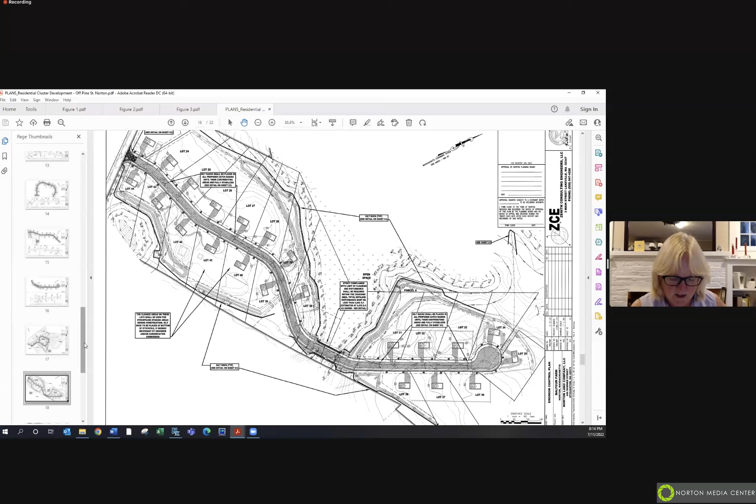Standard 6 really has to do with critical areas, discharging to critical areas, which is the Zone II, the interim wellhead protection area, which is the IWPA. They are discharging to a critical area, meaning that they have to have specific types of practices, similar to the infiltration basins, with the forebays and catch basins prior to that, which will collect some of the leaves and the debris. If it was a LUHPPL, we'd be more concerned, but it's clean water going into a critical area. We want to replenish that aquifer.

So they have certain criteria that they need to meet, and we want to make sure that they've clearly documented that they do comply with Standard 6. Again, it's a documentation process that we expect they will be able to meet. Standard 7 has to do with redevelopment, so it's not applicable to this project. Standard 8 has to do with erosion control, and we have a number of comments regarding what they should be showing in the SWPPP, making sure that they're meeting the erosion controls and providing significant, robust protection for the wetlands.

Standard 9 has to do with operation and maintenance and exactly who will be maintaining this, whether it's a homeowners association or the Town of Norton. It will need to be clear, so assuming it's a homeowners association, that the infiltration basins are maintained on a regular basis so that they can have a long lifespan. The forebays will need to be cleaned regularly, and the catch basins also should be cleaned regularly. We want to make sure they have a clear image of that, a very simple plan that shows where everything is, as well as who the responsible party is in the long run.

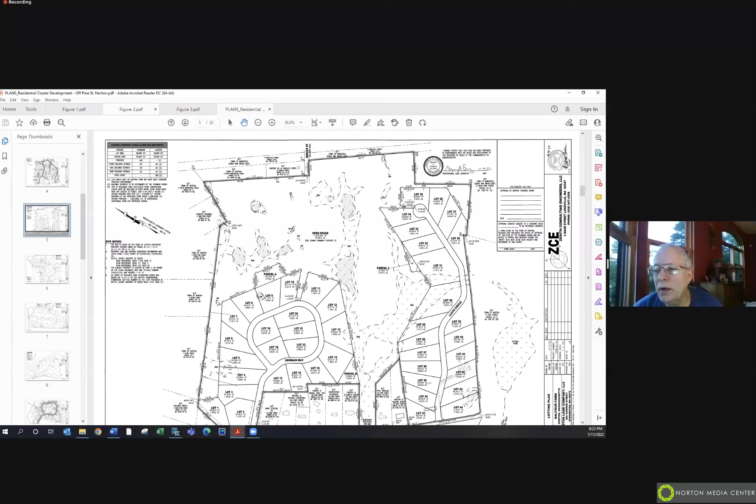Okay. So the next several comments are regarding the proposed mitigation. Commissioner Curtis also touched upon this briefly. The applicant is preparing a wetland replication plan for about a 6,000 square foot replication area, which provides for a greater than 1-to-1 mitigation ratio. And the explanation for the larger replication area does have some merits, as Ms. Wiesenberg pointed out. We would like to see some additional details presented on the wetland replication plan itself.

It's good that it's shown on the plan sheets, but the discussion should also demonstrate that it is following the Massachusetts Inland Wetland Replication Guidelines that DEP has put out, or any newer guidance that DEP may update. Specifically, we'd like to understand better how the proposed wetland hydrology will be achieved, and suggest that monitoring wells may be important to incorporate in the wetland replication area. And there should also be a plan for addressing any invasive species that may occur within the replication area.

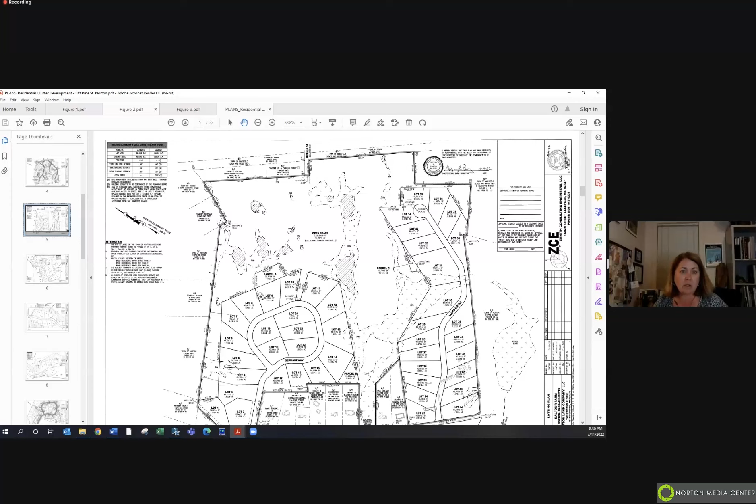commented upon an additional development across Pine Street that is owned by the same developer, and are seeking to know whether this proposed subdivision is part of a larger plan, whether there's a phase 1 or a phase 2 of this project, in which case we believe that could be construed as project segmentation. From a regulatory perspective, that's generally not acceptable, particularly where additional wetland alteration would be proposed. So those are our big picture wetland comments that we had both for planning board and for conservation. But I can turn it back over to the commission for comments.

Can we just have the key sheet to see where those, I'm sorry, are you talking about the prior ANRAD that was just in front of us? And I think I missed that hearing, but that may be. Okay, so it's to the west, I think. Can somebody scroll to the key sheet? Because I think it shows that other lot that was just before us tonight. I just want to get a sense of the segmentation.

If I can just note, that's right there, the lot that was previously before us for an ANRAD that has no connection ownership-wise or applicant-wise to the one we're talking about now. I think what folks are bringing up are these 3 lots across the street that had the same applicant for the ANRAD as this. So I just want to note this lot over here is under a different applicant. What's the status of the ones across the street? Those haven't been before us, right? Just for an ANRAD. Okay. We got an ANRAD review for this over last winter. Okay. Yeah. Thank you.

Well, if I could just make a quick comment before anyone else says, I would say this has a long way to go before at least I would vote for it.

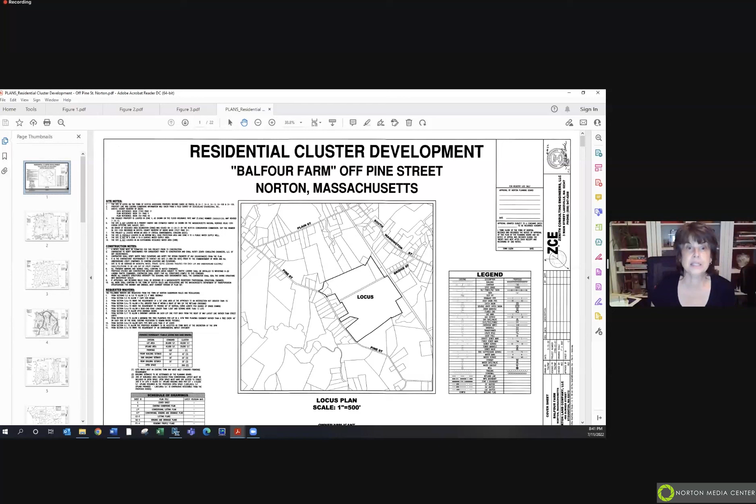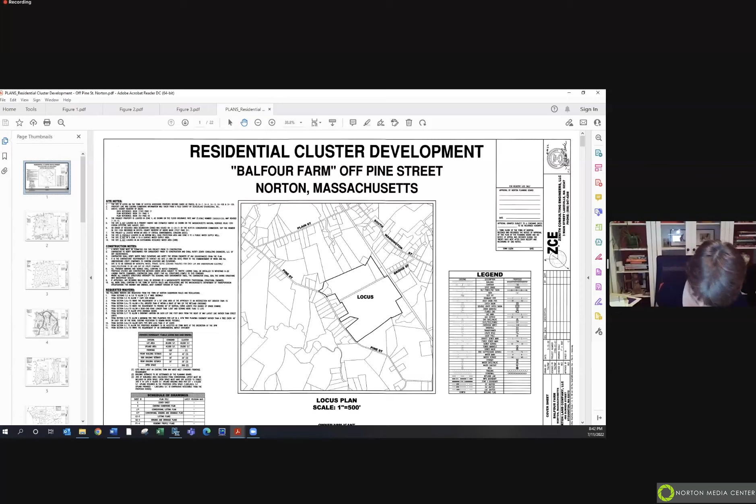There's no permitting per se, but they really need to provide additional details on how that's going to be constructed. And then we typically ask the contractor to provide what we call a frac-out plan, which is a frac contingency plan, because sometimes the method can breach the surface. It's like an emergency plan. The contractor has to make provisions for if something goes wrong during that drilling beneath the wetland. So we will be looking for additional details from the engineer on the setup of that, and then a deliverable by the contractor.

Okay, great. I had a question on the map on that proposed water main. It looked like after it left Germain Way, it takes a hard right turn, and I don't know what that is. The little circle area, is that just a depression where it makes that turn? It's not like a vernal pool, I would think, if it's that close, right? No, that's actually a hill. Yeah, that 100 there is the elevation, and then you see over here where my cursor is 85. Okay, I couldn't see those higher numbers. Thank you. Of course.

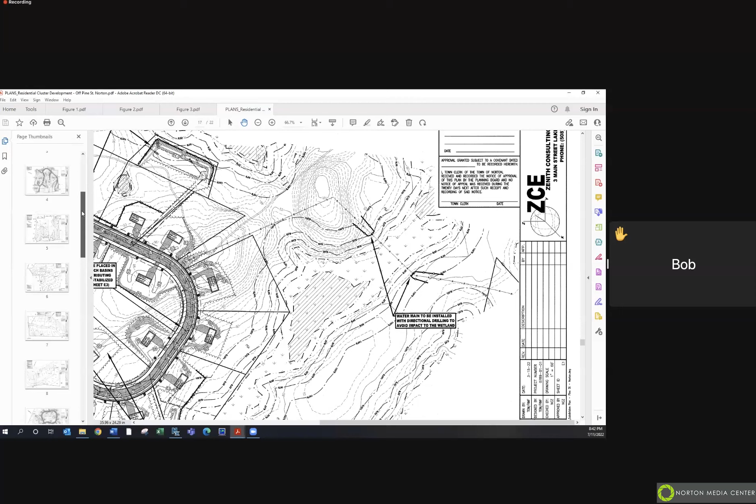I just have one last comment regarding the stormwater. This is a personal concern for me because I'm on the west side of Pine Street, across from Germain Way, on a lower elevation. And I have a constant stream behind my house that's fed by the storm and groundwater that comes from the east side of Pine Street near the proposed Germain Way. I think this might have been mentioned in the ANRAD prior to this, where there's a culvert that runs under Pine Street. I think it was referred to as an intermittent stream.

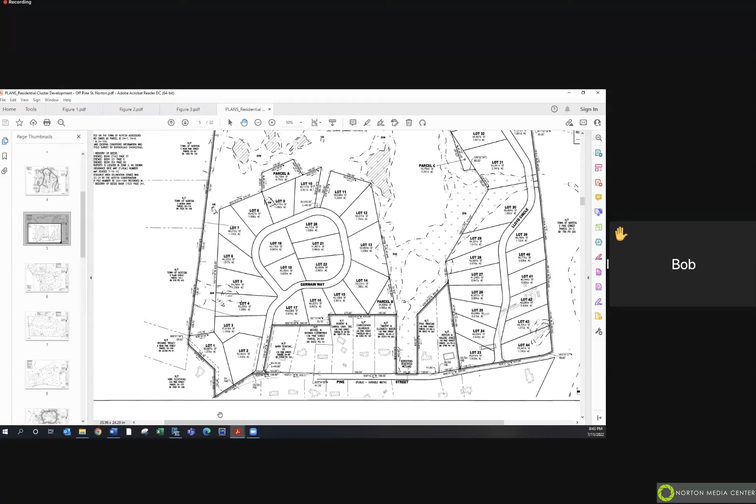However, I have the stream behind me. It's still flowing. It's July and we're in a moderate drought and there's still water flowing through there. So I'm not really sure what constitutes intermittent stream. I think I could actually point to that a little bit through a figure that I haven't shared yet, but it's in our notice of intent application.

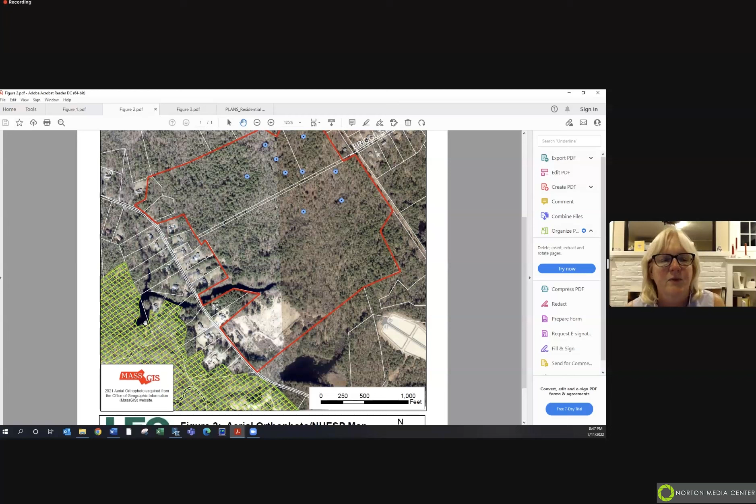Yes, the applicant is required to either reduce or they cannot exceed the existing flow offsite at any point off their property. And they have a small basin, I think the smallest one is up at the front to capture that runoff, right? I think there's a parcel A maybe that you've labeled it as. Oh, right. Lot 1. Isn't one of these basins in lot 1? Yes. This one here, right next to Pine Street? Yeah. So that will take some of the runoff, and they have to show that they cannot increase the runoff offsite to that point, to where you are.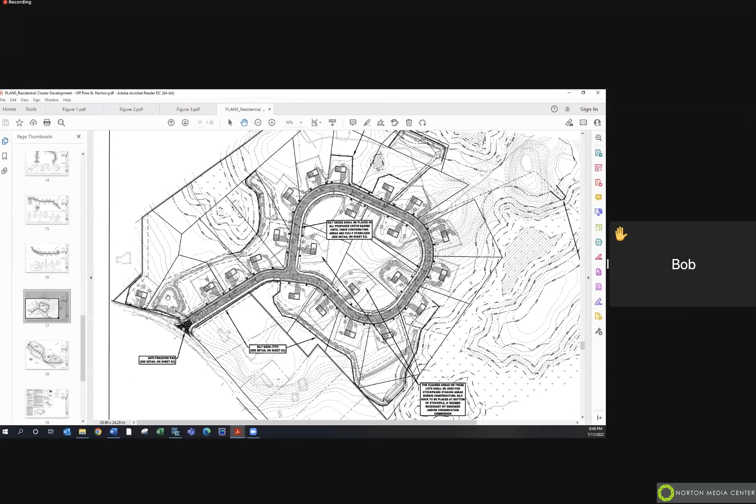Does it help? Okay. Yeah, I'm just worried about the water table just because our sump pump runs in the springtime. No, that's a good question. I would be interested to understand the distance that potential perennial stream is from Pine Street, if it's more than 200 feet.

That is a requirement. If it's a perennial stream, they have a 200-foot riverfront area. Buffer? It's not exactly a buffer, it's the riverfront area that they cannot increase. And there's more regulations. It's a wetland resource area if it's within 200 feet of the riverbank. So I guess the question is for Claire, if that perennial stream casts a 200 foot this far up, right?

And the perennial stream we've been talking about is which one in relation to? It looks different on this than it does on that aerial that you have. Yeah, it definitely does. It doesn't show anything on this. Yeah. Right. So here, like we have this pond on our site, and I guess your question is this feature, is that functioning as a perennial stream? Right. We can look into that.

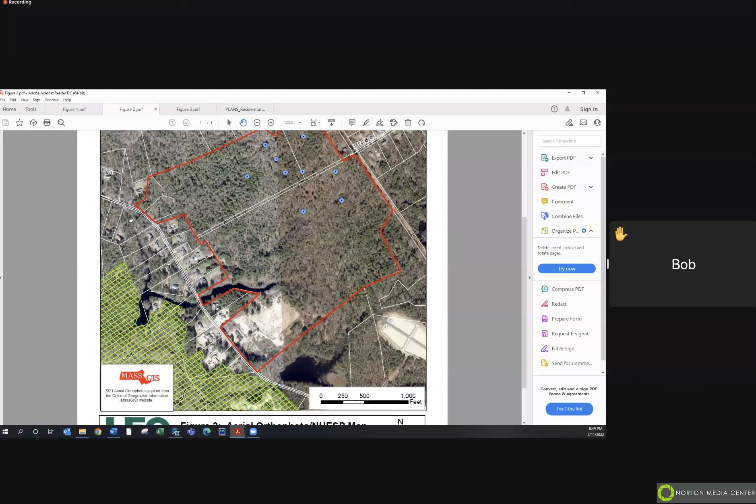Yeah, all right. So Bob, we're going to have more hearings on this, and so that's all I have, anyways. Thank you, appreciate it. All right. Thank you. And there are other people waiting for questions, so we want to give them a chance. Sure. So thank you for your questions. And I think next up is Brad Jones, or at least the computer labeled Brad Jones. So if you want to go ahead and ask your question.

Howdy. Oh, this is getting me in trouble. Can you all hear me? We can hear you clear. Fantastic. Thank you very much. I'm going to be quick.

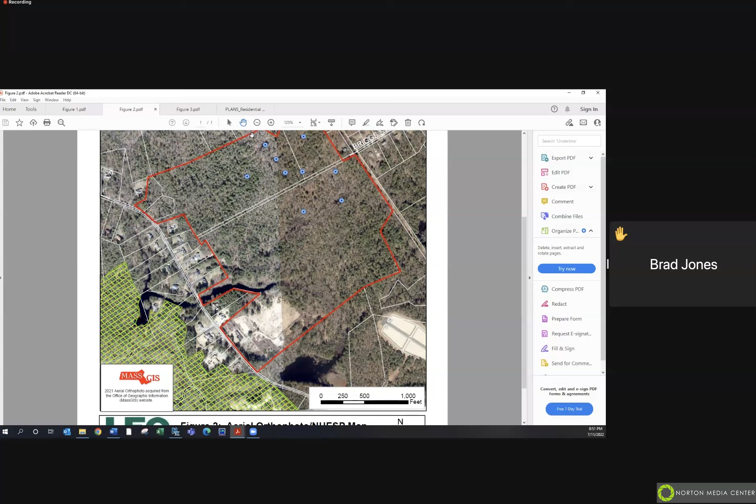I think actually Horsley Witten covered this a little bit. It's gratifying to hear there's legislation on it. I was going to bring up the multiple projects on Pine Street, and since we are adjacent to the area with the Wading River and the 3 Mile River, I would just like to ask to consider everything carefully. I know you can't really add studies beyond the purview of the Wetlands Protection Act, but just to really consider all of that carefully, since I see no reason why the wetlands on the east side of Pine Street would be any different in terms of habitats that might contain endangered or critically threatened species. So thank you very much for all the work that you do. Thank you.

Good. So I don't think there was a question that we can respond to in there other than an observation. And next up is Sharon Donovan. Go ahead and identify yourself. I'm Sharon Donovan. I live at 79 Pine Street, and I believe we've talked about a few of these issues, but I just wanted to mention taking into consideration the amount of land that's going to be potentially developed and how that's going to affect the environment and wildlife. And I believe they are going to be doing a wildlife study. Is that correct?

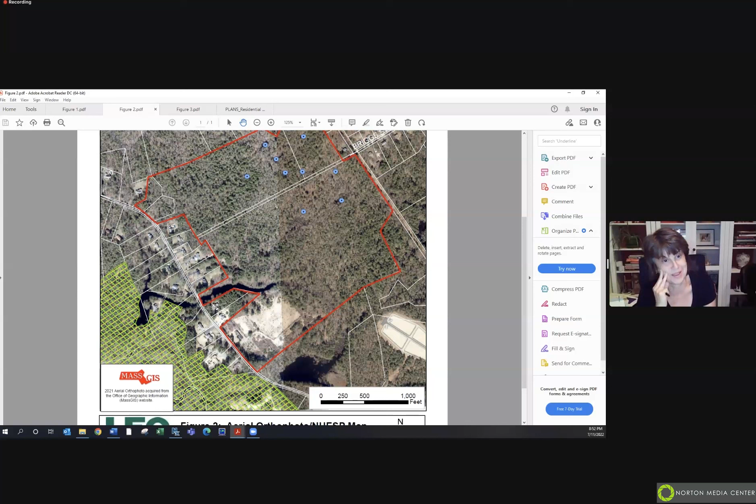We are doing the environmental impact statement for the planning board. And I think we've also asked you to do the wildlife habitat assessment for the crossing, the BVW crossing, right? But I'm also curious if you're going to give us an alternatives analysis in support of that limited project status, if you even get that far, the connectivity and fragmenting the habitat for vernal pool. Right, I have that in my notes. Thanks for the reminder. Habitat assessment or vernal pool connectivity, whatever you want to call it. But yes, there'll be more than one, Sharon. Okay. I just wanted to mention it. I know we see quite a few bats around our house, and I think that's something that they're looking at closely lately.

Also, I wanted to mention the potential for filling in the wetlands so that they can add the additional 8 homes. I'm just wondering why they needed to do that for another 8 homes if they're already building quite a few homes. So I believe that was a part of the conventional plan that was put together. I'm just going back to the plan set and showing the sheet that had the expansive development, and this is what the applicant had put together to show if we proposed a conventional layout, what could be possible, and that totaled to 44 lots.

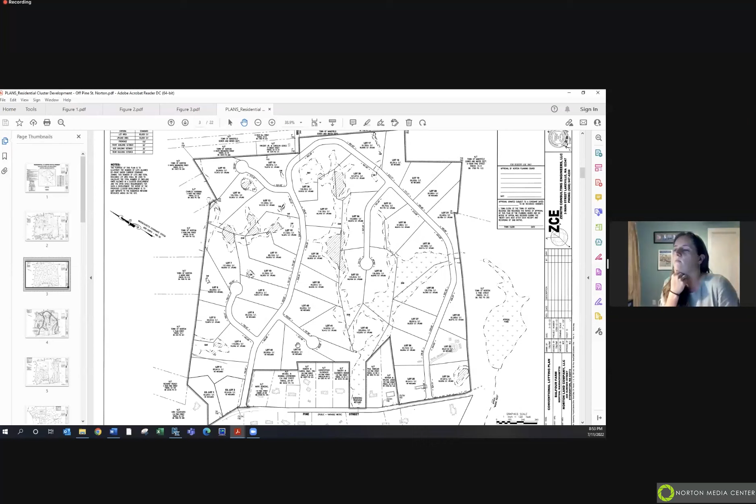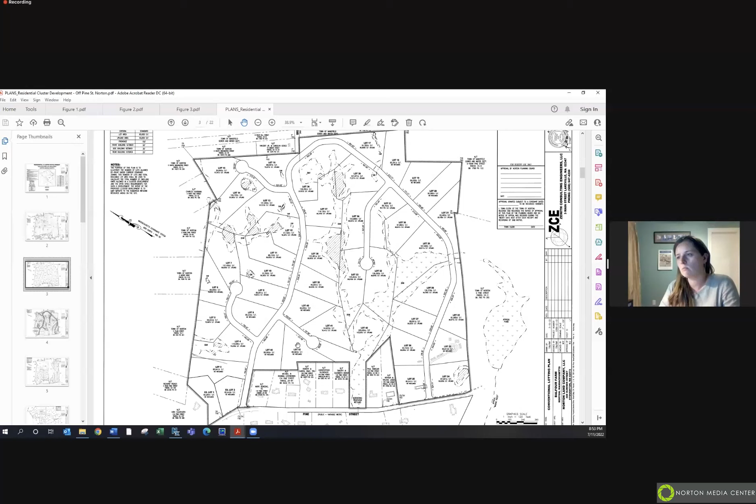So that gets tied into the design of a cluster development, essentially not allowing them, but giving merit to asking for 44 lots by stating if I wasn't asking for the special permit, this is what I would be proposing otherwise. And how many lots are with the cluster? I'm sorry, say that again? Oh, it's 44 conventional. What's the cluster? 44. Oh, it's the same. Right. Okay. Okay, thanks.

So my other observation, I think you mentioned there was something on the map about the wellhead protection area, and we talked about groundwater use in wells, and we already have a lot of issues with our water on Pine Street, and I believe it's due to a well that is close to where this project is going to be developed. So I just had some concerns about that.

That's the town well, right? I believe so. Yeah. And I just saw that there was a wellhead protection area. Yeah, that's the town wellhead protection area. I think the first thing you could probably do, because I walk this area quite a bit, is to get the whole neighborhood to stop with the dog crap there, because it is their drinking water supply. Sorry, what was that? You could probably ask the neighborhood to start picking up their dog waste because it's all over the place in your wellhead, in your drinking water supply, which I find ironic.

Interesting. Yeah, but in all fairness, that's what the wetlands do, is filter out any bacteria that come from animal waste. And, you know, you can't stop the deer and the raccoons and everything else. So that's why we like to keep the wetlands protected, to be sure that what finally makes it into groundwater and aquifers is pure.

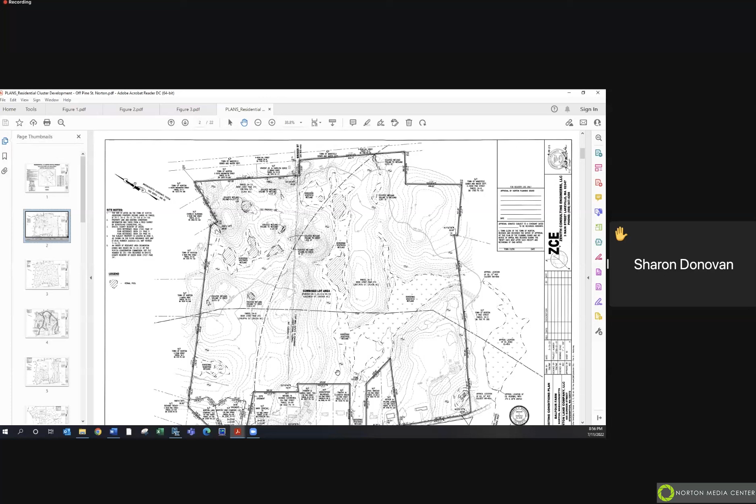Ms. Donovan, I don't know if you have any further comments, but if not, we will move on. I just had one more comment, and I'm not sure if this is at all possible, but the property where they're looking to develop is kind of a special area, and I don't know if you've ever been out here or if the Conservation Commission would take a little field trip to come visit the property. Yeah, I was going to make a suggestion at the end of this hearing that we absolutely take this for a site visit by the commission. We do them for larger projects. Okay, great. Thank you.

All right, and so next up on the list, I believe, is Karen Duhamel. At least that's the computer name. Go ahead and ask your question. Hi, it's Karen Duhamel. I'm at 82 Pine Street. Can you hear me? We can hear you loud and clear.

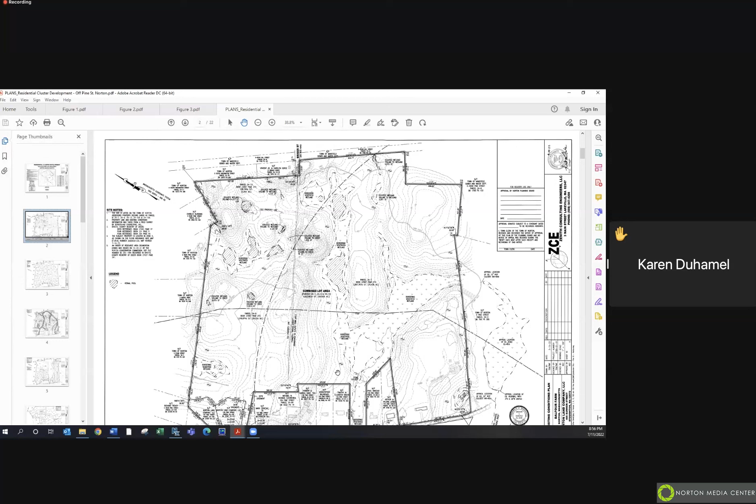Thank you. So per the Norton zoning, dead-end streets should be 1,000 feet or less. If that bylaw applies, then Lloyd Circle would end before the wetland and no fill would be necessary. Is that correct? Well, I gotta say that's out of our purview. That's really a planning board wrestling match. I don't think we can comment because we're not gonna add anything meaningful, and that's where planning can help you. Okay, just want to bring some light on this.

All right. Any further questions? Otherwise, we'll go on to Jim and Brenda Carroll. So Jim and/or Brenda, you're up if you want to address your question. Yes. This is Brenda Carroll, and Jim and I live at 157 Pine Street, directly across from the proposed development.

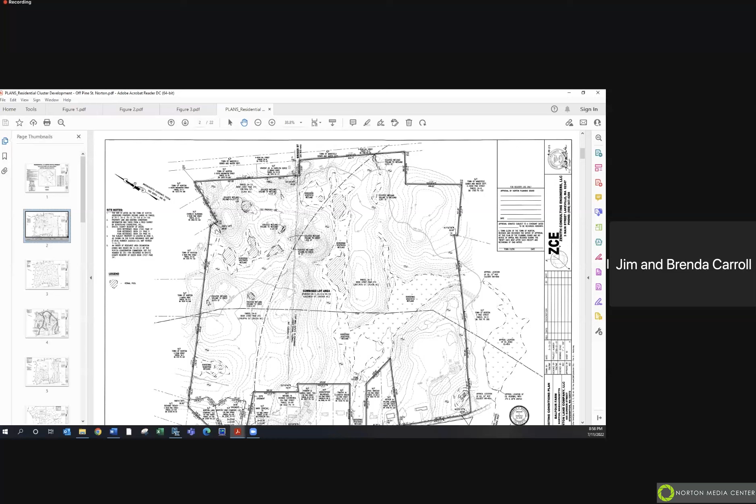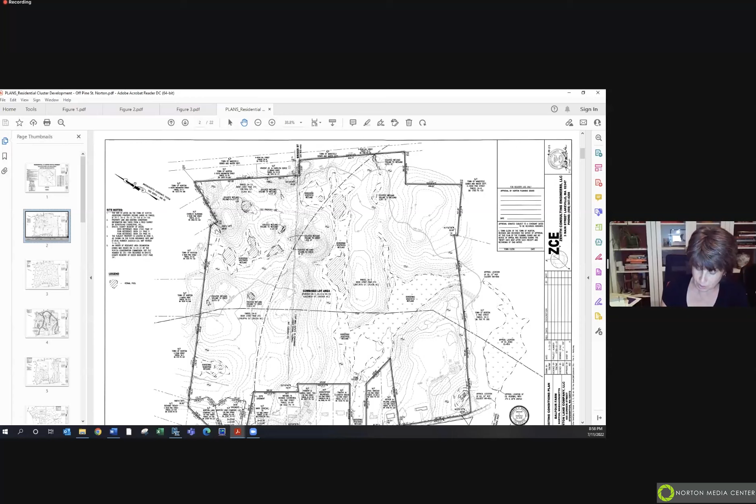I noted that on the conventional plan, there's some question about the interface of the wetlands delineations and the number of lots proposed. I was wondering who determines the veracity of the 44 lots as they interface with the wetlands delineation. Oh, so that's probably the upland buildable ratio that planning or zoning requires. In other words, they carve out the lots, and the lots have to meet the minimum criteria in terms of size and frontage and setbacks, things like that. That's a zoning planning board issue yet again. Okay, thank you.

All right. So we don't see any more hands up, and unless there are questions, clearly this will need to be continued. I think Claire has a laundry list of things that have to be addressed. Do we actually have a number here? So that's not an issue outstanding. But our next meeting is on the 25th. I don't know if that's too soon to address all these issues.

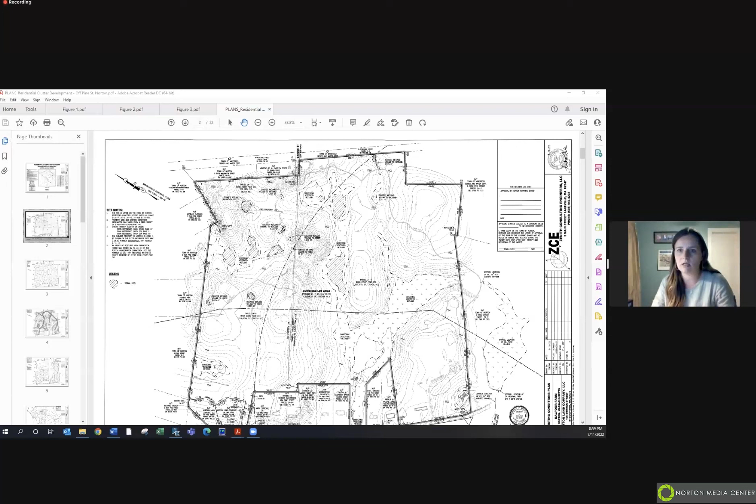I would say it's too soon, especially since I would like to see the updated Horsley Witten comment letter that was submitted today. And I think we would like to have a chance to respond to that in writing and respond to commission members' concerns and abutter concerns in writing before we would present again. And we'd probably like to be able to submit that and give all the commission members a chance to review it and the peer reviewers a chance to review it as well. So I definitely think continuing beyond the 25th would be advisable.

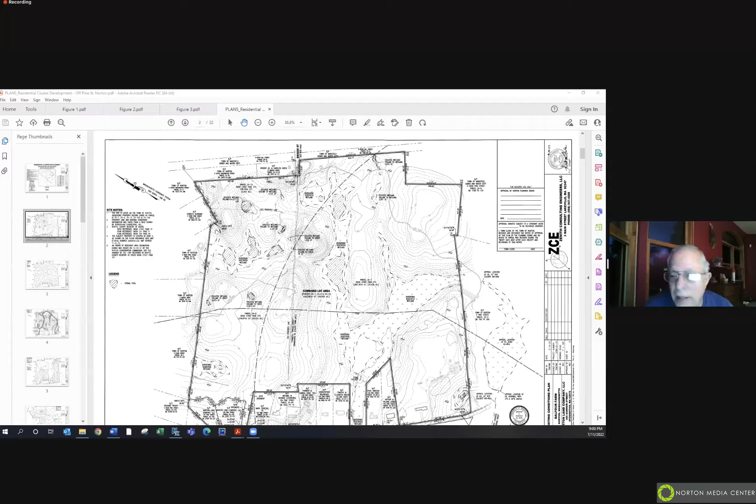So the next meeting after that is the 8th of August. Now, before we go further, I just need to give everybody a heads up that while this is a Zoom remote meeting, we were scheduled to go to in-person meetings for our next meeting. So just be aware, but that is still in flux because it was brought to our attention that there is now yet another bill in the legislature to potentially extend the time of remote meetings. So please be aware that you have to clarify exactly where the meeting is going to be, whether it's going to be an in-person meeting or remote, with regard to any members who want to follow this.

So I think unless there are further comments, questions, we can consider a motion for a continuation of this hearing for file number 250-1104 until August 8th. So moved. Second. Okay, so we have a motion made by Carrie, seconded by Dan for continuation of the hearing till August 8th. A roll call vote beginning with Ron and Carrie. Aye. Aye. And Dan and Lisa. Aye. Aye. And we have Tama and Mark. Aye. Aye. And I'll throw in an aye.